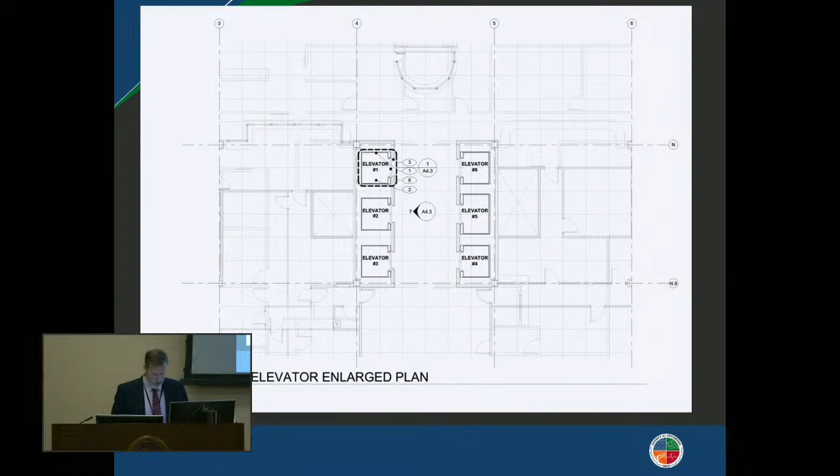I am happy to take any questions related to this project. I got a question - start time for these, we know it's going to be 8 months, but would the start time be after the Division of Police vacates?

To the sheriff, we would anticipate a bid period of the next 4 months, and then construction award and the start of the 8-month construction duration. I think we will have to understand the schedule for the Division of Police departure and make sure we coordinate with that, because for their departure, they'll be using the freight elevator system in particular. So we will pay attention to that during the execution of this project. It should time out pretty well, though.

Thank you. The only question I have, and I just want to be clear, is that the old elevator from the old city jail is not a part of this project. Is that accurate?

That is a 1-floor elevator from the former city jail 6th floor to the 5th floor transfer corridor. That is not part of this project. Correct. Judges, any questions? Okay, thank you, Matt.

Why don't you go on to number 2, please? Okay.

The second project is a building envelope project for a large portion of the facility complex. The primary leak mitigation that we're trying to solve is in the atrium structure, where that atrium structure borders and connects to the Courts Tower granite structure, and associated leaks in the actual window systems of the atrium itself.

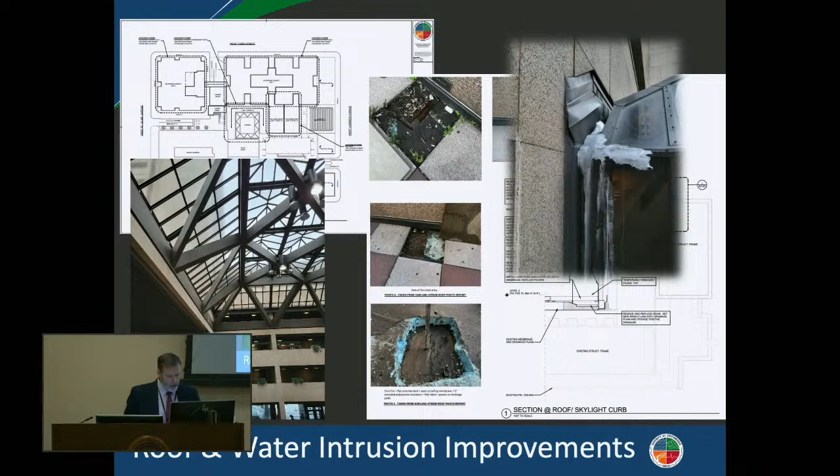We will be performing sealant work on the glass atrium structure. We'll be performing flashing and sealant work where the gutter systems and the flashing connect to the Courts Tower granite wall system. We'll be pulling the paver systems on the courtyard at the 4th floor level and investigating the roof condition below the pavers, repairing any conditions underneath those pavers, and improving the drainage systems on that level.

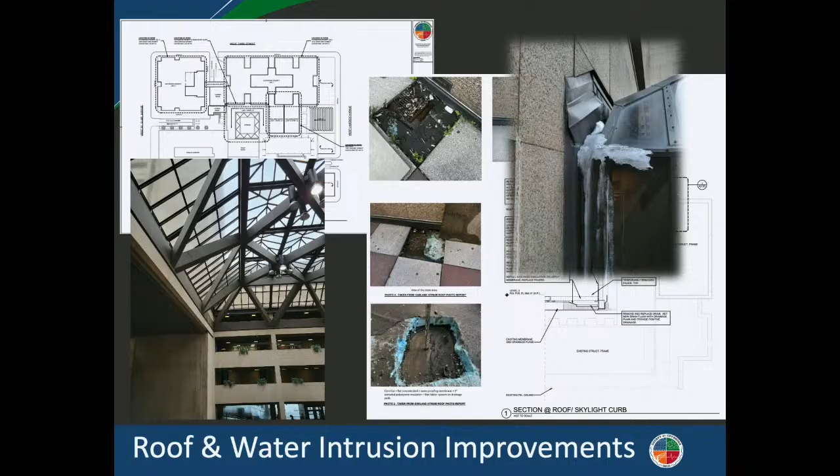Also part of this, I'm going to shift to another diagram just to show you the complete picture - this is a schematic plan view of the entire Justice Center complex block. The majority of the work is in the center atrium. We also have roof replacement happening over the Galleria roof, as we call it on the plan.

If you can see my cursor, let me see if it shows over here. You see my cursor on your screen. This is the area that is immediately above the lakeside entrance to the atrium. That is both above court areas on the 3rd floor, specialty docket areas on the 4th floor, and the jail bullpen court holding on the 5th floor.

The roof above that whole section is scheduled to be replaced as part of this project as well, where we have water intrusion.

We also have designed the replacement of various sections of the correction center. Most importantly is this shaded area above Jail 2 - this is the elevator penthouse. As many of you know, we just modernized the elevators in Jail 2. That's critical to the operation of the correction center, and this project considers the replacement of that penthouse roof.

We are also seeking alternate bid item pricing for the remainder of the Jail 2 roof and these 5th floor pocket roofs on Jail 1. They had not been previously replaced. I will say that our design process on this started when the future of the jail was less certain, and so we are continuing to move forward with their recommended replacement, but at a certain price.

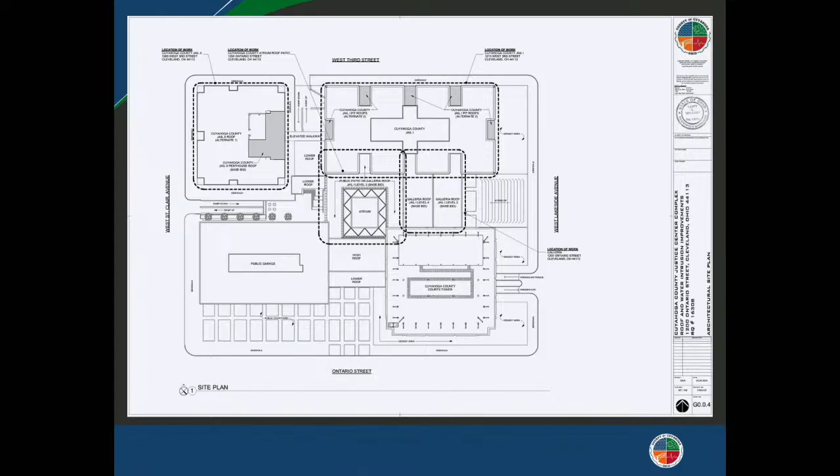So that's why we've considered them for alternate bid pricing options, meaning at the time of bid, if we think the pricing is worth the risk mitigation for the duration of the building that we have left, we'll consider that, but we have to make that determination at the time of bid.

And then we can decide that moving forward.

So what we have on the base bid for this project is all the atrium work, all the Galleria work above the lakeside entrance, and the elevator penthouse above Jail 2. That's the base bid. All remaining items are alternate bid items as proposed.

The total project cost on this project is $3.36 million, rounding. The duration of this project is expected to be 16 months from contract award.

To further break that price down, as I mentioned that alternate bid structure, of the $3.36 million, we anticipate a little over $1.8 million is for the base bid, and a little over $1.5 million are for the bid alternates to be considered.

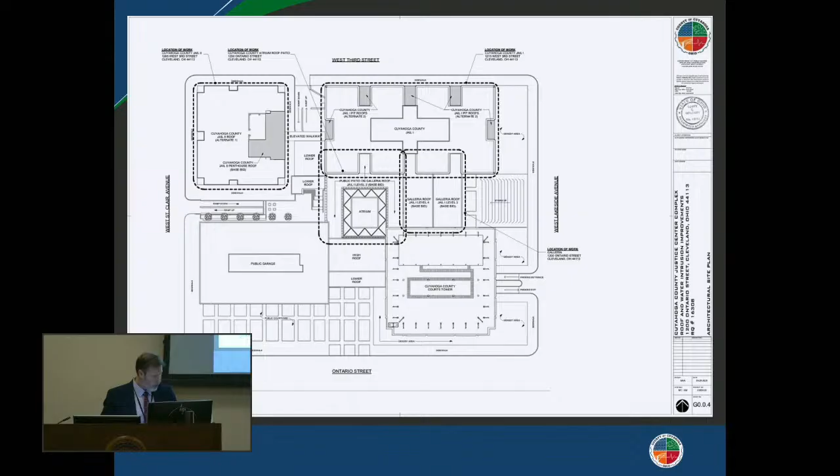Happy to answer any of your questions. I don't believe we have any questions on that one. Thank you.

Go on, Matt. Thank you.

The third project that we are considering today are structural repairs to the various garage levels within the complex.

I'm going to just shift to my next slide really quick. You can see this is a schematic and plan view of all the various parking level or vehicle circulation levels.

Underneath all the facilities, at the top of the page, areas 1 and 2 are generally the areas under the Jail 1 structure. Area 6 and 7 is generally under the atrium and mostly considered part of either the dock or the judge's garage, as is area 5, 9, and 8.

And then the police level, you can see that's underneath the Tower 2 police building. So we have repairs that are designed for all 3 of these areas of concern.

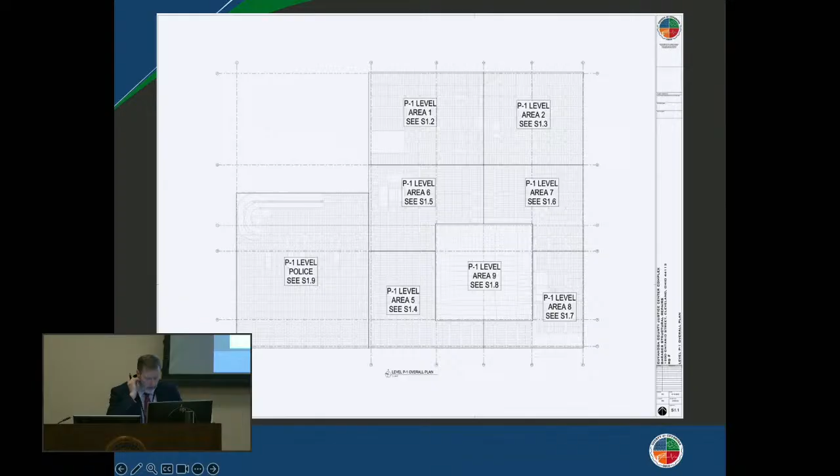I'll go back to the pictures now. The majority of the things that we're mitigating are concrete spalling over time, water from vehicles coming off the roads, and from other water intrusion that tend to corrode the reinforcement in the structural members. They expand, then they pop the concrete spalls.

So this is repairing those concrete areas and the reinforcement within, back to a repaired condition. We're steadily doing make-safe repairs where we remove any loose concrete to make sure areas are safe for pedestrians walking through and for vehicles themselves.

That has been ongoing, but this project will come back then and repair all those open areas or areas at risk. We do have some significant areas of beam reconstruction to perform in this project.

Those areas are generally under our vehicle ramps in all 3 structures: underneath the dock ramp in the atrium, underneath the Sally Port in Jail 1, underneath the drive-in off of Lakeside, that major beam, and then also the same thing off of St. Clair in the police garage.

And this project is estimated at just under $1.6 million. From time of award to completion, we estimate a 6-month construction duration.

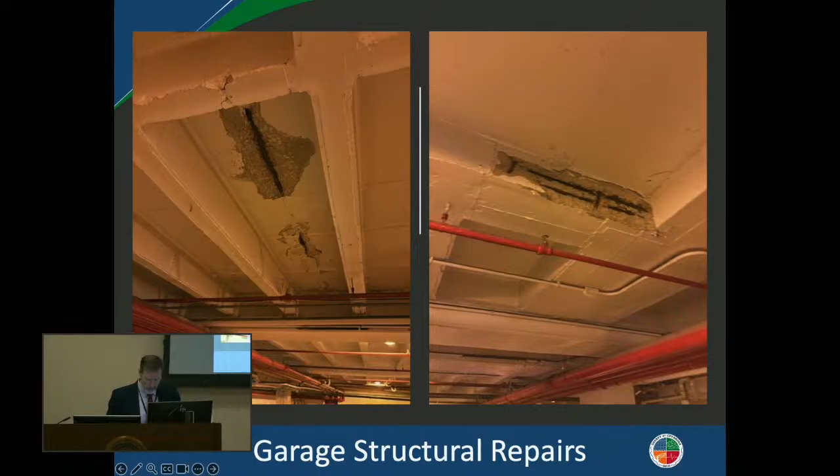I'm happy to answer any questions. I have a quick question, I just want to make sure I understand this project. So this project is for the 3 garages, right?

Which would be the judge's garage, where the clerk also parks, the judge's clerk's garage, the sheriff's garage, and the West St. Clair garage. Is that all? That's correct.

And do you have the breakout of how much of that $1.6 million each garage will cost? Yes. I have breakdowns prepared between the judge's garage and...

I may have to get back to you on the first one, but the breakdown between what's underneath the Jail 1 Correction Center is roughly $603,000 of value in this project that is underneath the Jail 1 structure. And then the remaining, under $1 million, is what is between the police building and the judge's garage.

Got it, so I know that'll be a consideration when we get into post-bid allocation of funding. I will say what's also important to consider is where these repairs are relevant structurally. So in general, if we're fixing something on the P2 level, that's generally relevant to what's above it on the P1 level, as an example.

The bulk of the $600,000 I mentioned underneath the Jail 1 structure is directly supporting the loading dock off of West 3rd that supports the entire facility. So we do have to consider a lot of things, not just the geography, when it comes to funds allocation once we get the bid results here.

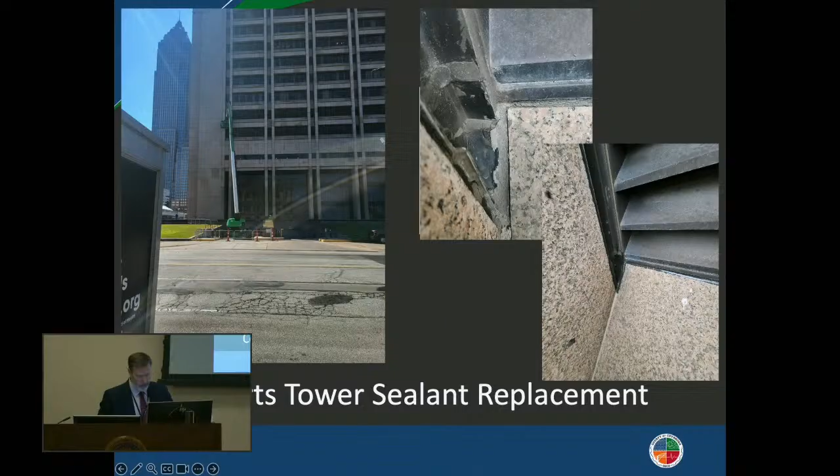I'll just say that the interaction between this project and the water intrusion project for the atrium goes hand in hand. As water gets behind these granite systems, you can see it when you're down in the atrium today. You look up at the corner connection with the Courts Tower - that's not necessarily because the windows are leaking, it's because there's water probably running behind that granite system, bypassing all the flashing that's connected to the atrium and then showing up within the structure. So these 2 projects do go hand in hand. I think both have to be completed in order to be successful in securing the building envelope.

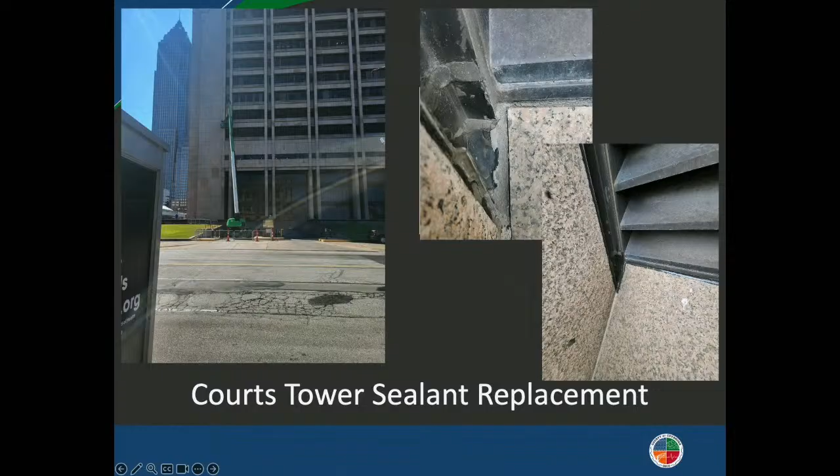The estimate on this project is large, $6.44 million. The time estimate on duration from contract award is estimated to be 12 months. Happy to answer any of your questions.

Yes, Judge, question regarding the cost. I believe the original figure was 2.5 million, and now that's 6.5 million.

Judge, you are correct. We had a budget estimate of 2.569 million when we presented this to the building committee in August of last year, and the construction documents, which come from a third-party consultant estimator familiar with construction, at this design completion stage came back much higher. So we are anxious to see if that's how it plays out at bidding as well.

Any idea why so much? Could I look to Scott maybe to see? I mean, the original estimate was a little bit undervalued compared to the entire scope of the Courts Tower. We have a third-party cost estimator, Regency, that prepared this. They're a local contractor, construction firm, and we're very confident in that dollar figure. But yes, the cost has also just generally gone up for this type of work. So there's good quantity takeoff on this - we know that the actual quantities of sealant footage performed is accurate. The estimating science comes in with what is the labor cost and the equipment cost of doing that.

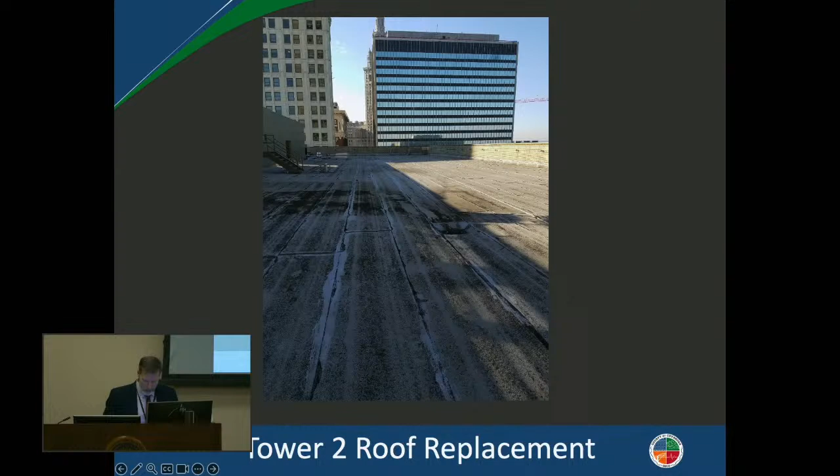This project has a current estimate of $4.18 million rounding, and has an 8-month duration estimated from time of contract award.

This project is going to begin, if I understand correctly, after CPD vacates. Is that accurate? That is our intent, Clerk Bird, yes. So by the time we bid the project out, we'll be getting towards the end of the calendar year anyway, so we'll be targeting the project at a good time where the roofing companies are looking for their next year's worth of projects to plan and bid competitively for. So we expect a good competitive bid here because of our timing. It should also work where by the time they start getting ready for seasonal operations in 2027, the police should be significantly out of this facility. It will result in a lot of disturbance on the 9th floor. That's why we're intending to time it that way.

Okay, do you have any other questions? Okay, thank you. Is that the last one? That is the last one.

I'll just give the total presented here today as a project value at this stage, and again, before we get bids, but total cost of $19,945,781 is the total for consideration for all 5 of those projects. That is of interest.